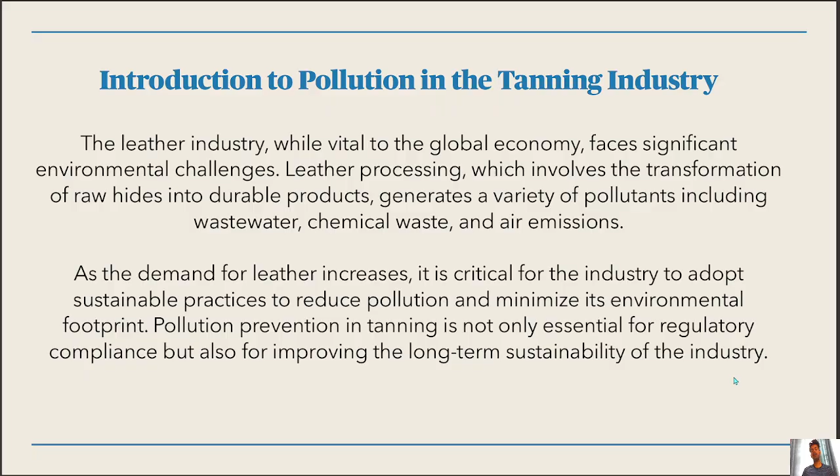Environmental impact of leather processing. Tanning processes, especially in traditional settings, can cause substantial environmental harm. Key pollutants include chemicals such as chromium, sulfides, ammonia, and organic matter. These pollutants affect the core environmental elements of air, water, and soil.

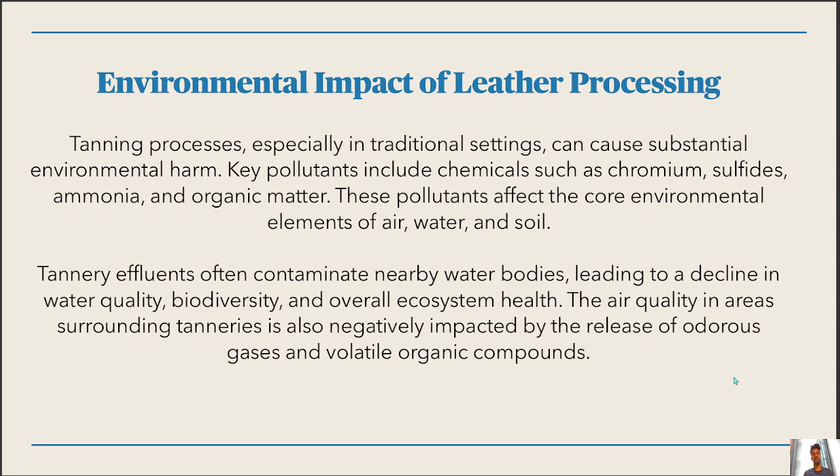Tannery effluents often contaminate nearby water bodies, leading to a decline in water quality, biodiversity, and overall ecosystem health. The air quality in areas surrounding tanneries is also negatively impacted by the release of odorous gases and volatile organic compounds.

Wastewater management in tanning. Tannery wastewater is a major contributor to pollution due to high chemical load and contaminants like chromium and salts. Effective wastewater treatment is crucial to mitigate the environmental impact. Various methods, including biological treatment, chemical precipitation, and reverse osmosis, are commonly employed to reduce pollutants in the effluent.

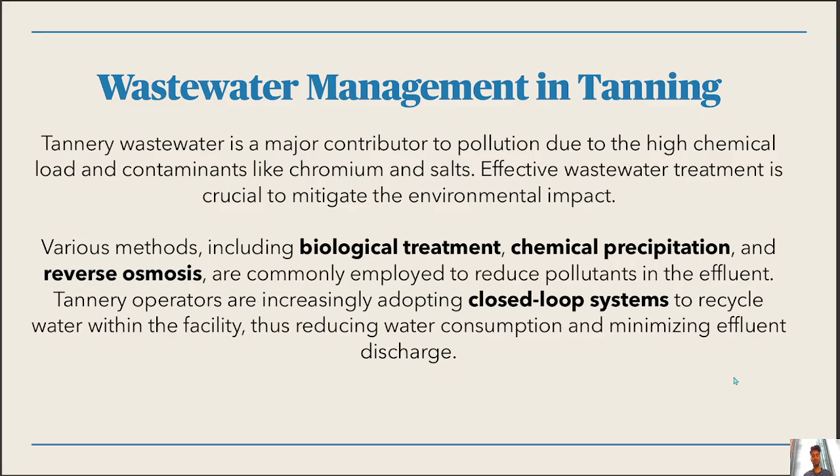Tannery operators are increasingly adopting closed loop systems to recycle water within the facility, thus reducing water consumption and minimizing effluent discharge. Chemical waste and its control. The tanning process uses a variety of chemicals, including chromium salts, lime, and sulfides, all of which can contribute to significant environmental pollution. Improper management of these chemicals leads to hazardous waste generation, which can contaminate soil and also water.

Advances in chemical management include the use of more sustainable chemicals like vegetable tannins and the recovery and recycling of chemicals like chromium. These practices help reduce the overall chemical load and improve the environmental performance of the tannery.

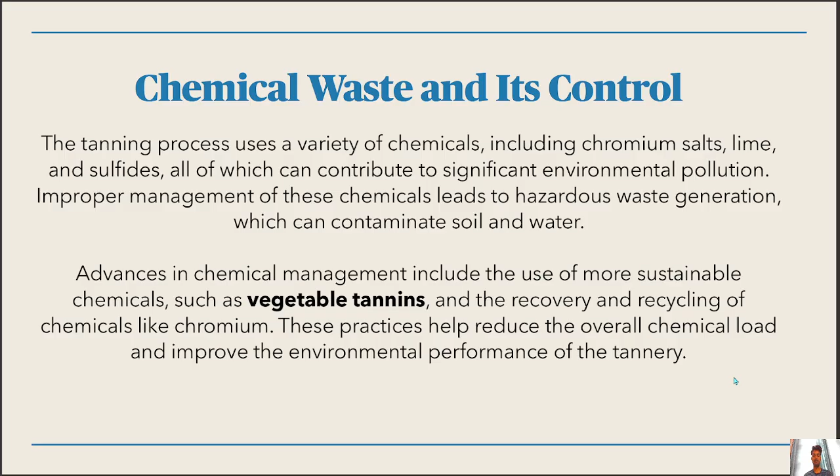Cleaner production technologies in tanning. The adoption of cleaner production technologies is one of the most effective strategies for reducing pollution in the tanning industry. Cleaner technologies focus on minimizing waste generation, reducing energy consumption, and replacing hazardous chemicals with more environmentally friendly alternatives. Technologies such as enzymatic dehairing, chrome-free tanning, and waterless dyeing are gaining traction in the industry, offering cleaner alternatives that not only improve the environmental footprint but also reduce operational costs.

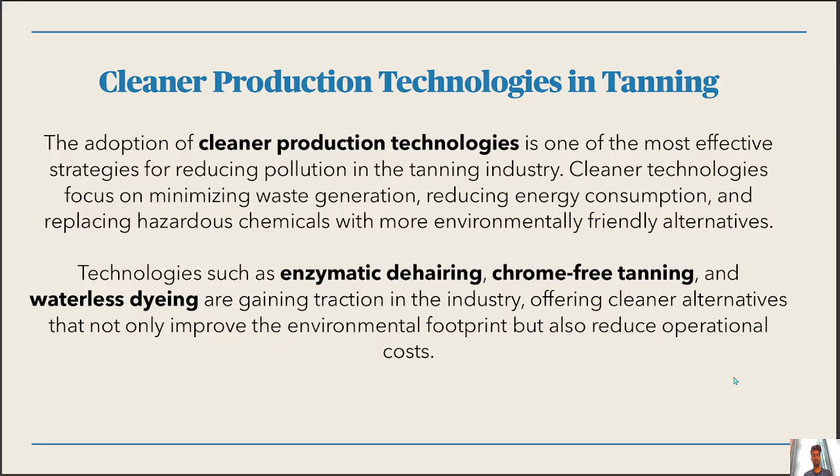Waste minimization measures in tanning. Systematic implementation of waste minimization strategies can help tanneries reduce pollution and improve profitability. Key measures include reducing water consumption by optimizing soak and rinse processes, reusing chemical solutions, and minimizing the use of harmful chemicals. Efficient water conservation strategies such as installing water meters and flow meters to monitor usage are essential.

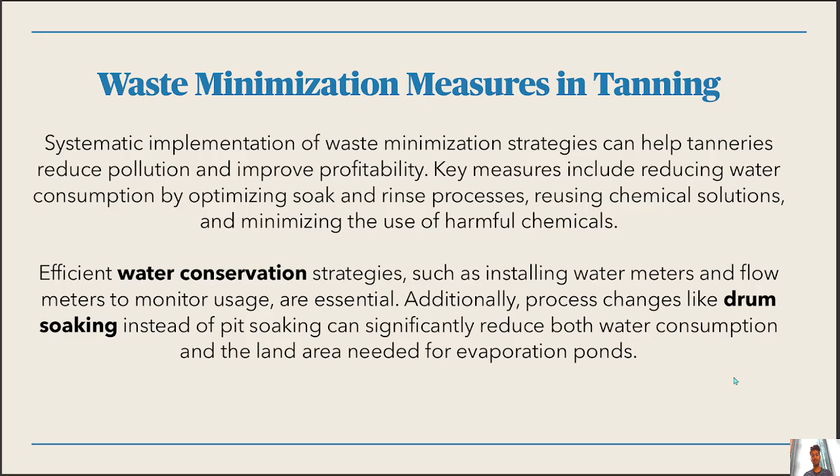Additionally, process changes like drum soaking instead of pit soaking can significantly reduce both water consumption and the land area needed for evaporation ponds. Solid waste management in tanneries. The tanning industry generates significant amounts of solid waste, including hide trimmings, fleshings, and sludge from wastewater treatment.

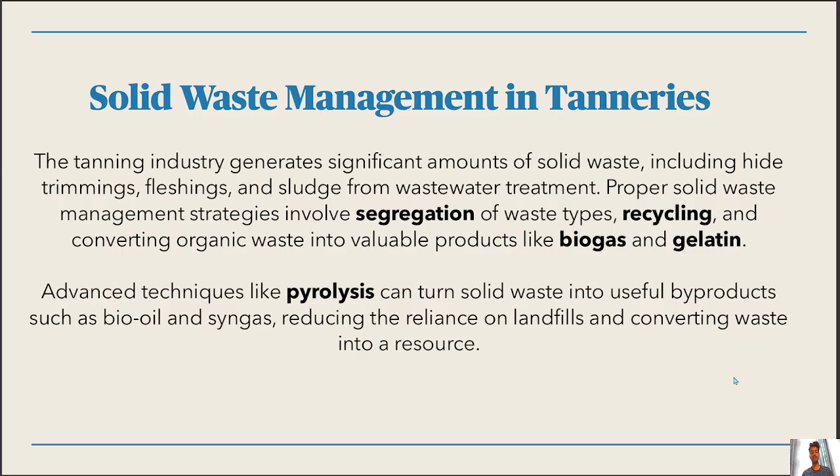Proper solid waste management strategies involve segregation of waste types, recycling, and converting organic waste into valuable products like biogas and gelatin. Advanced techniques like pyrolysis can turn solid waste into useful byproducts, such as bio-oil and syngas, reducing the reliance on landfills and converting waste into a resource.

Efficient resource use and energy management. Efficient resource management is crucial for reducing environmental impact and improving sustainability in tanning operations. Energy management strategies such as using solar power for water evaporation can reduce the carbon footprint of the tannery.

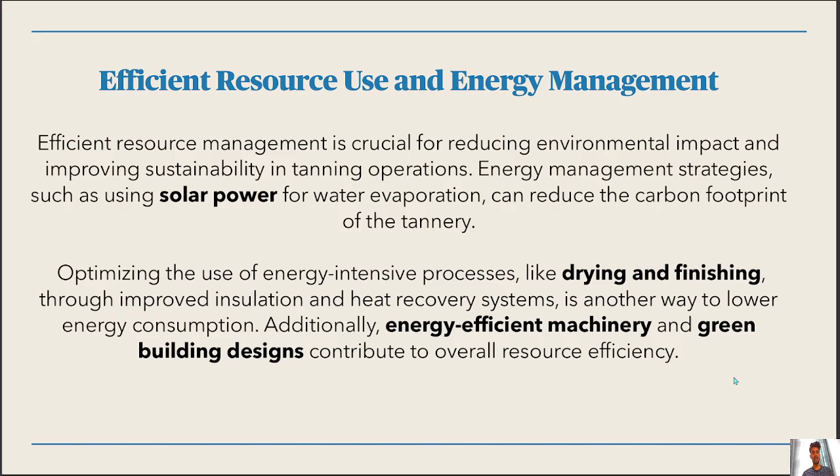Optimizing the use of energy intensive processes like drying and finishing through improved insulation and heat recovery systems is another way to lower energy consumption. Additionally, energy efficient machinery and green building designs contribute to overall resource efficiency.

Pollution prevention at the process level. Pollution prevention at the process level involves optimizing each stage of leather production to reduce waste generation and chemical use. For example, in the soaking process, the use of counter current systems allows for the reuse of soak liquor, reducing both water and chemical consumption.

In the liming stage, substitution of paste lime with pure calcium hydroxide reduces chemical use and sludge formation. At every process step, there are opportunities to minimize waste generation through better control and optimization.

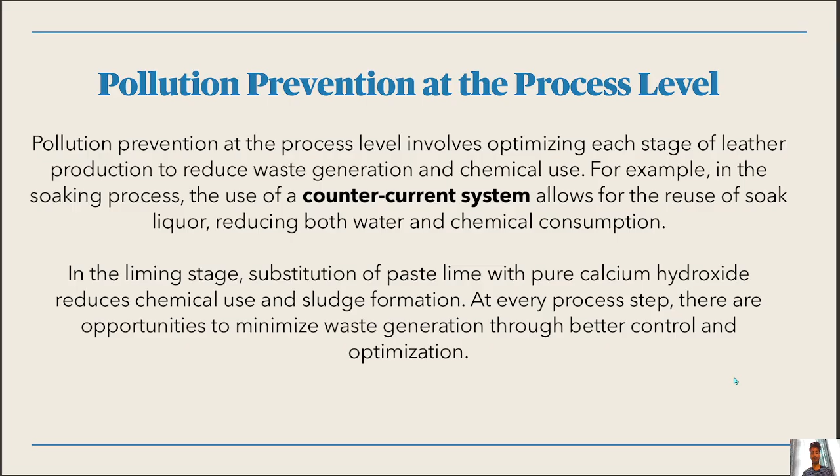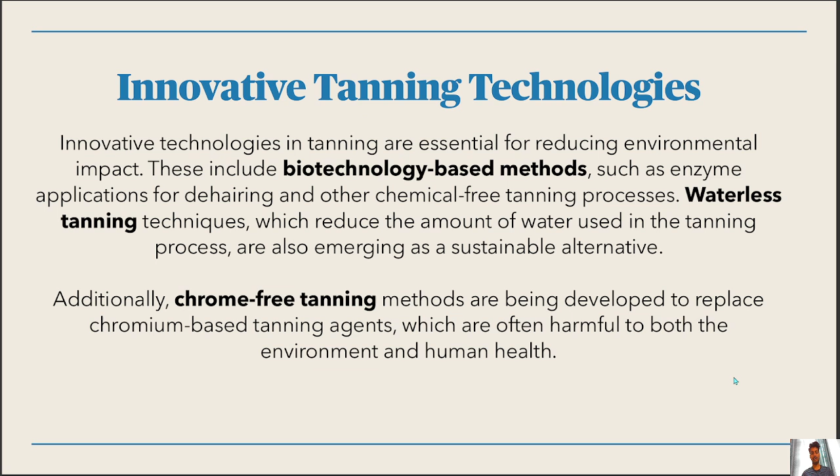Innovative tanning technologies. Innovative technologies in tanning are essential for reducing environmental impact. These include biotechnology-based methods such as enzyme applications for dehairing and other chemical-free tanning processes. Waterless tanning techniques, which reduce the amount of water used in the tanning process, are also emerging as a sustainable alternative. Additionally, chrome-free tanning methods are being developed to replace chromium-based tanning agents, which are often harmful to both the environment and human health.

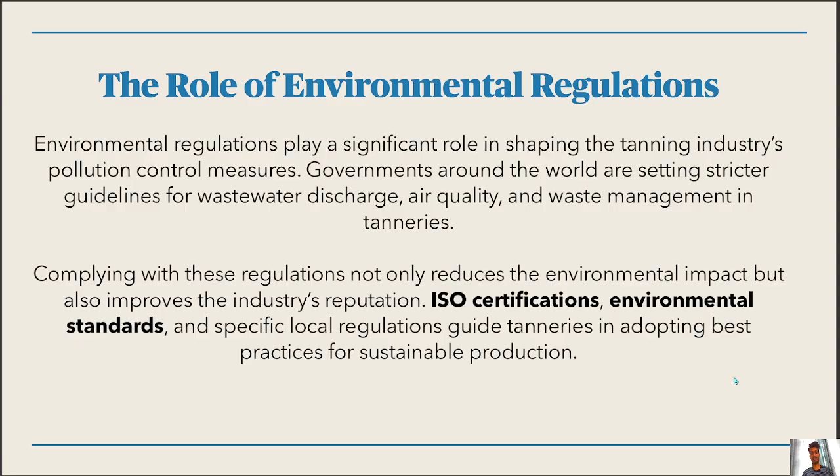Environmental regulations play a significant role in shaping the tanning industry's pollution control measures. Governments around the world are setting stricter guidelines for wastewater discharge, air quality, and waste management in tanneries. Complying with these regulations not only reduces the environmental impact but also improves the industry's reputation. ISO certifications, environmental standards, and specific local regulations guide tanneries in adopting best practices for sustainable production.

Global best practices in pollution control. Several countries have adopted global best practices in pollution control for the tanning industry. For instance, European tanneries are leading in the use of closed-loop systems for water and chemical recycling, significantly reducing their environmental impact. India has made strides with the installation of centralized effluent treatment plants that handle the wastewater generated by multiple tanneries in a region. Sharing these best practices can help tanneries worldwide transition to more sustainable operations.

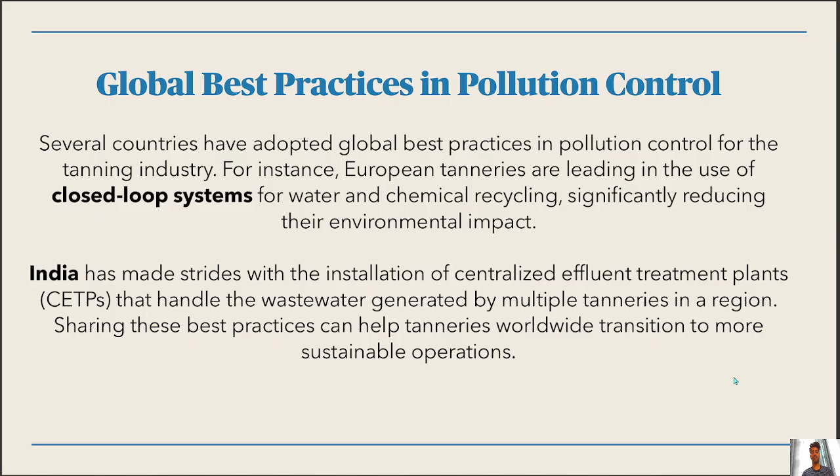Case studies of sustainable tanneries, which can be very important actually. Several tanneries have successfully adopted sustainable practices, serving as a model for the industry. One example is a tannery in Italy, which replaced traditional chrome-based tanning with vegetable-based tanning, drastically reducing the environmental impact. In Brazil, a tannery implemented a zero liquid discharge system, recycling 100% of its wastewater. These case studies highlight the feasibility and benefits of adopting sustainable practices in the tanning industry.

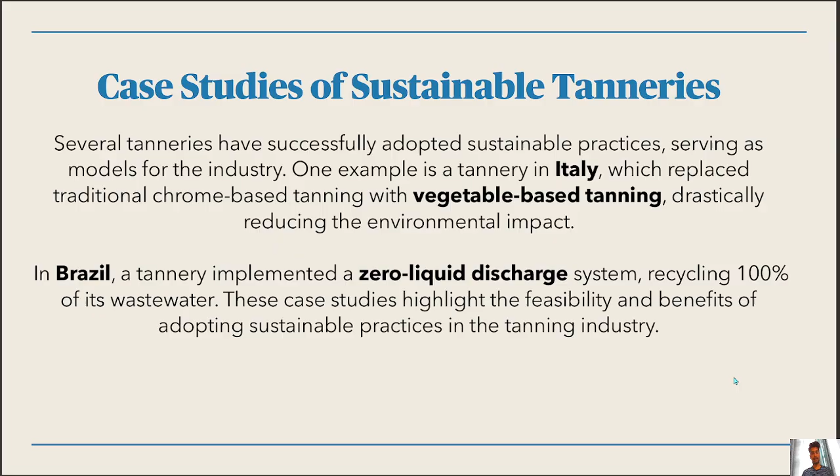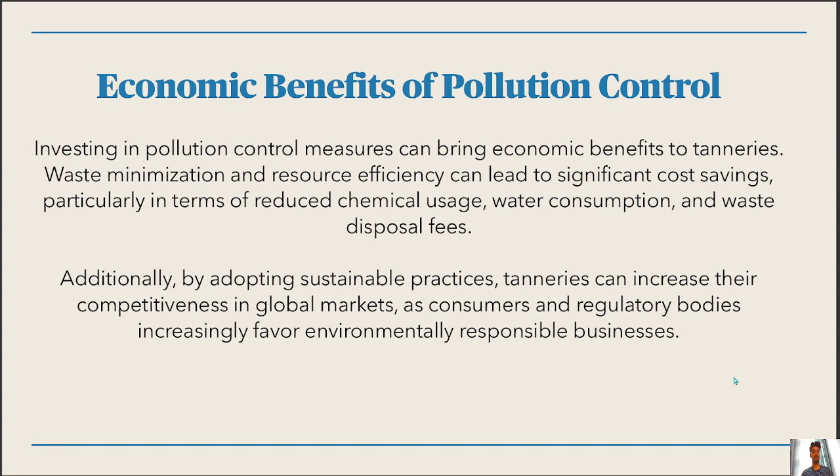Economic benefits of pollution control. Investing in pollution control measures can bring economic benefits to them. Waste minimization or resource efficiency can lead to significant cost savings, particularly in terms of reduced chemical usage, water consumption, and waste disposal fees. Additionally, by adopting sustainable practices, tanneries can increase their competitiveness in global markets as consumers and regulatory bodies increasingly favor environmentally responsible businesses.

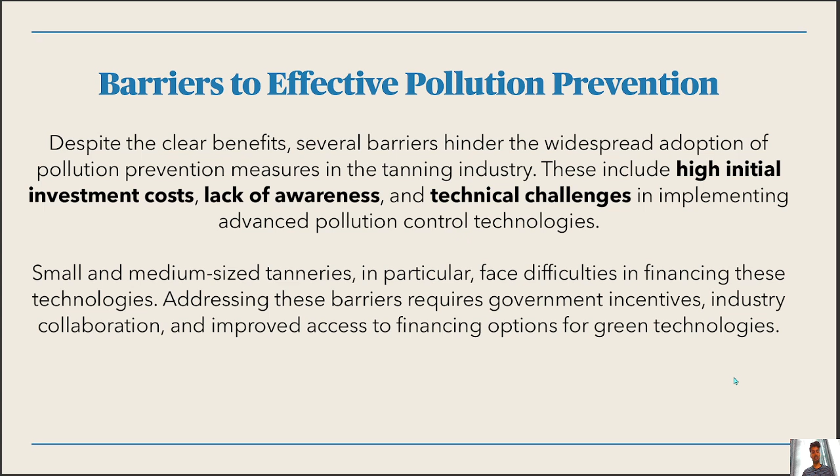Barriers to effective pollution prevention. Despite the clear benefits, several barriers hinder the widespread adoption of pollution prevention measures in the tanning industry. These include high initial investment costs, lack of awareness, and technical challenges in implementing advanced pollution control technologies. Small and medium-sized tanneries, in particular, face difficulties in financing these technologies. Addressing these barriers requires government incentives, industry collaborations, and improved access to financing options for green technologies.

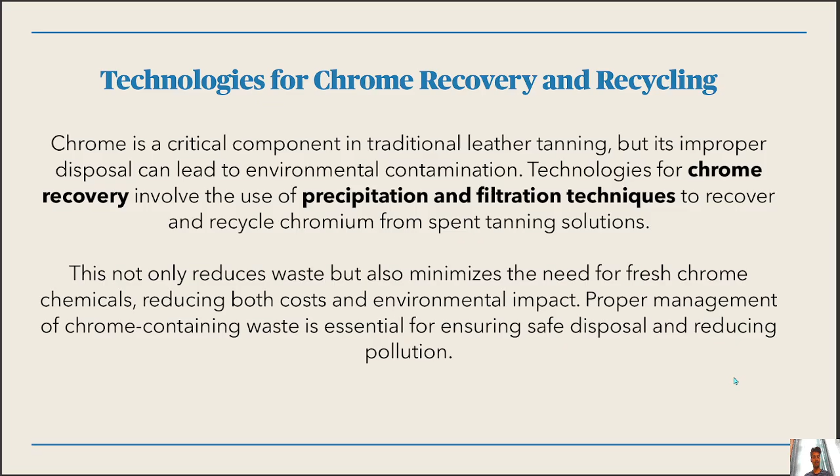Chrome is a critical component in traditional leather tanning, but its improper disposal can lead to environmental contamination. Technologies for chrome recovery involve the use of precipitation and filtration techniques to recover and recycle chromium from spent tanning solutions. This not only reduces waste but also minimizes the need for fresh chrome chemicals, reducing both cost and environmental impact. Proper management of chrome-containing waste is essential for ensuring safe disposal and reducing pollution.

How big is it, man? Okay, I had two more.

Pollution control technologies in air and water. To address the air and water pollution caused by tanneries, various technologies have been implemented.

Okay, fine, you can just read it on your own. You're all educated. You all have been brought up to read. You can read, right? I mean, what am I speaking in the morning, man? Mind my English, please. I meant to tell you all have been taught how to read. And the slide is just there. You can read on your own by pausing the video if you want to. But yeah, I'll just run through the slides.